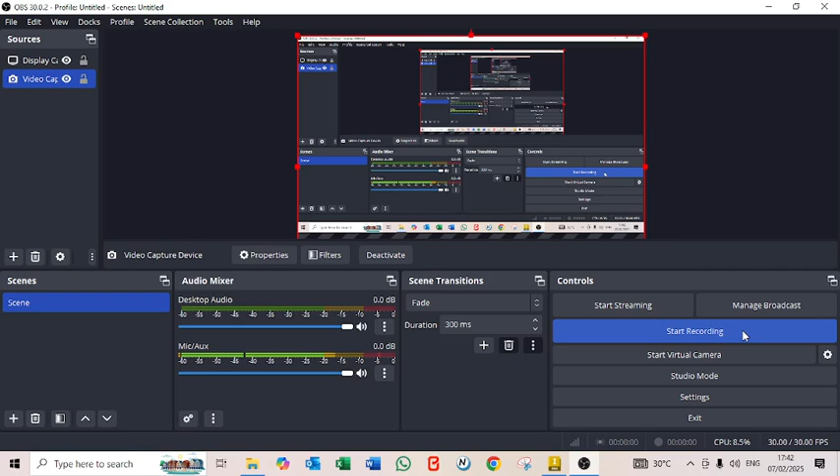Okay, so I just want to explain briefly how to go with the process of doing the plant layout and the positioning of the equipments. Then after that, I need to draw the equipment and how to assemble it, just for few students who might have challenges, so that you can see it's not something difficult, it's something easy.

So you have opened the program of Inventor, then I'll go to new, just for me to start the whole drawing, the whole project. So I need to draw the site first. Yeah, it's still opening. Let's give it a bit of time.

So I'll choose the way I want my pipe rack to be. Each and every student, you've been given a mandate to use different methods so that you can learn. Don't copy what I've done, but use the concept that I'll give you as an example.

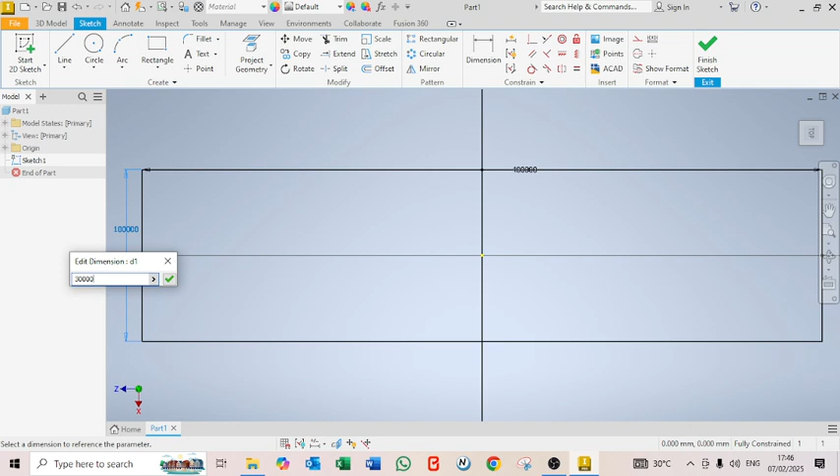So this is my site where my plant is going to be. After doing that, I'll extrude, because it is representing the land where the plant is going to be.

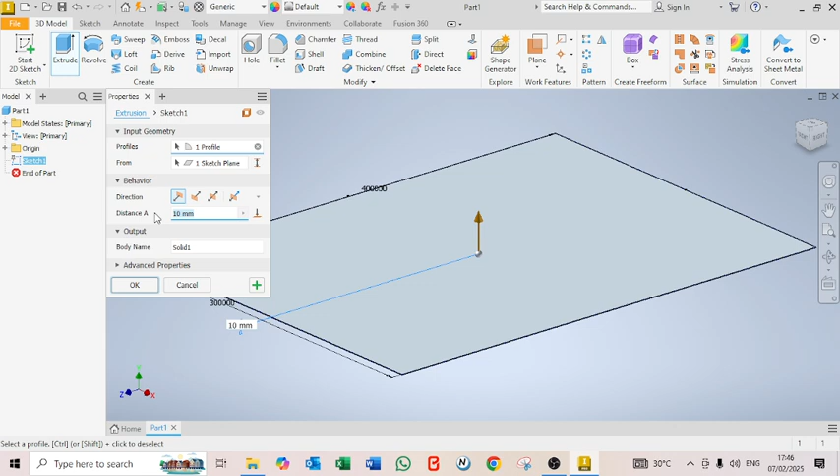So the thickness, I'll just assume, let me just say maybe 100. Yeah, that's the thickness. Then I'll go to sketch and click on it.

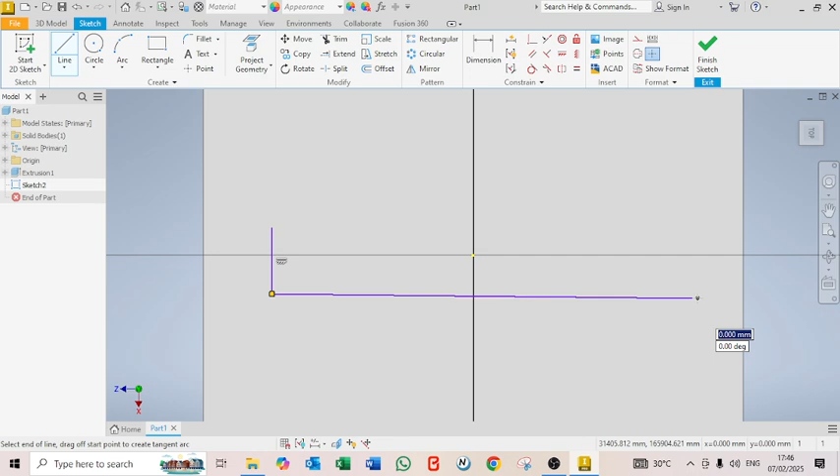Just setting up where my pipe rack is going to be. So I want my pipe rack to take that position, and okay, fine, sorry for that. Okay, I just enjoy to draw without caring so that I can have control over the constraints. Yeah, so I'll constrain this vertically and horizontally, cancel.

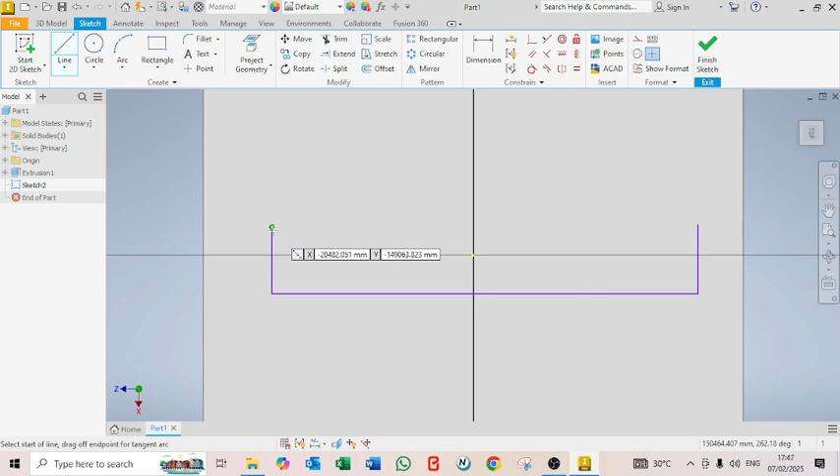Then I have to draw a line from there and there, then also I'll do the constraint of this. Okay, it's fine. Then I'll say equals, just to make sure that my lines, when I click on one, they'll be fine. Okay, so they are already equal. Then I'll put dimensions.

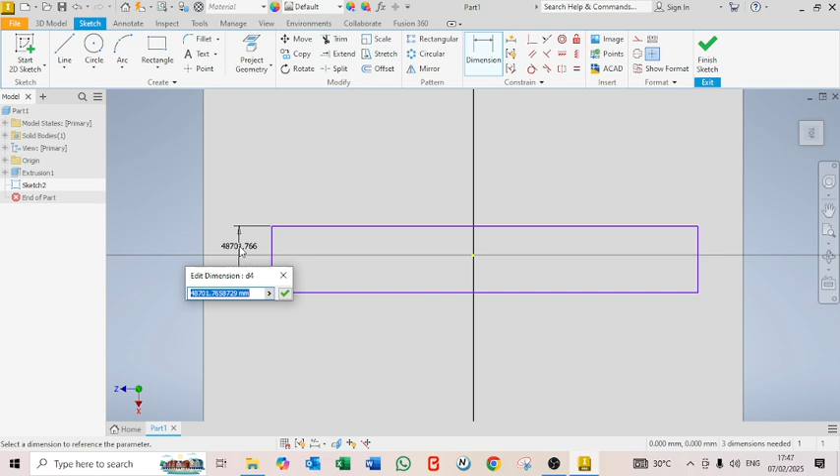I want the spacing between the prints to be 10,000, which is 10 meters. And the total length of my pipe rack, let me just take it to be 200,000. Then okay, I'll increase to 300,000.

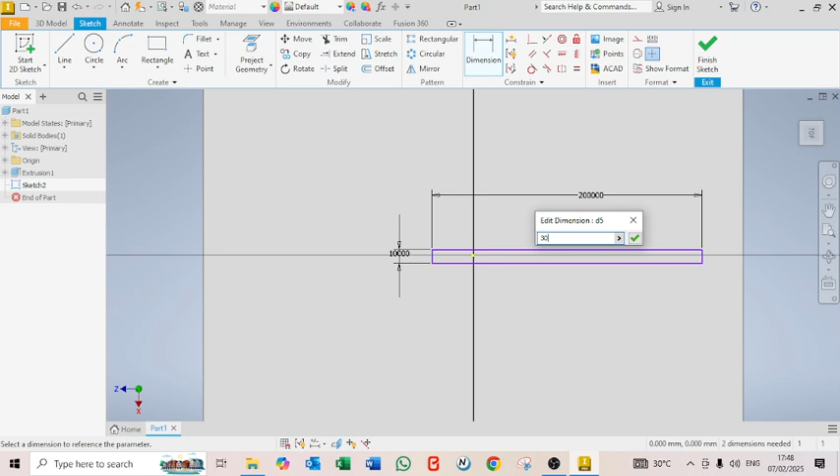Okay, as usual I'll just do this. Then vertical constraint, I want it centralized, so I'll pick that green dot, click once and click there. Then it will be centralized, and on horizontal also I'll do the same, centralized. So that is the position of my pipe rack.

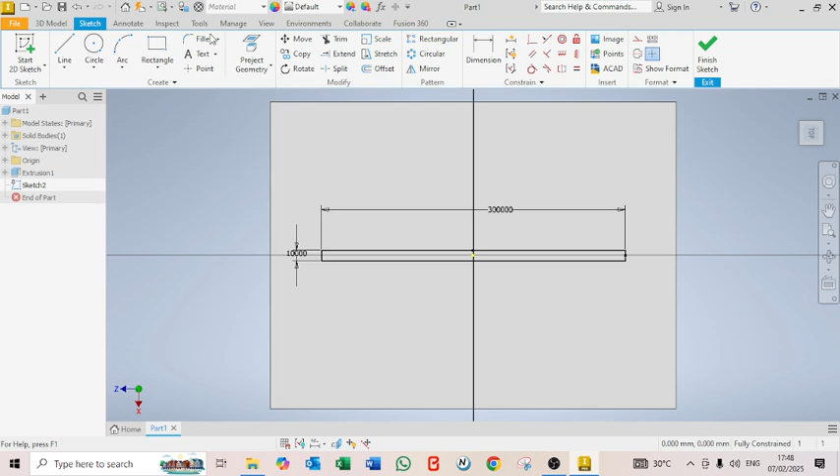So why have I drawn this? The reason is I want to put the plinth at the corner there. I just want a simple one, straight one. Yeah, other students, as I said, you can do it the way you feel is the best. Okay, sorry, I don't want it to touch.

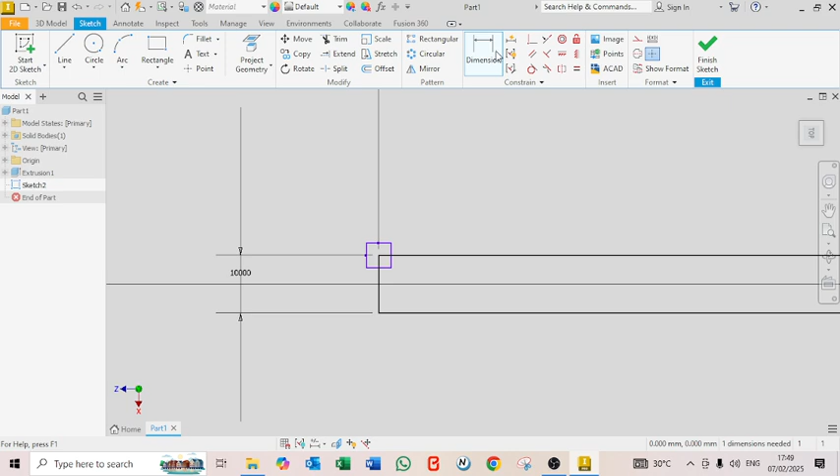So I'll say this one must be constrained to that corner. Then vertical, I want this one to be constrained to that. Then I'll say equals, this line must be equal to that, and the plinth will be just 300 across. Oh, look how small it is.

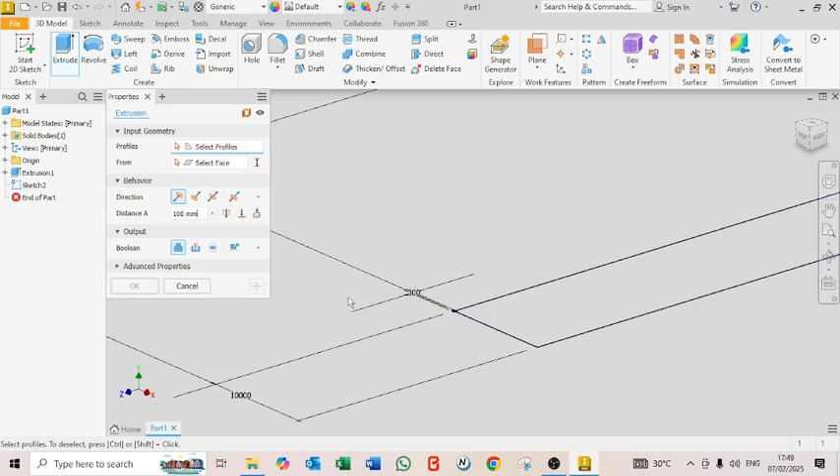Yeah, then from there I'll finish and extrude the plinth. I don't want everything, I just want that. Though I drew the whole thing, it's just for you to see how you would do the setup, but at times it's not necessary to do the whole thing. You just need to position the plinth where it will be.

Okay, I've got it 300. Click home, it's a very tiny thing, you can see there. Yeah, then array. I'll do the array of this, and the direction, I'll pick that. Also, I'll also pick that.

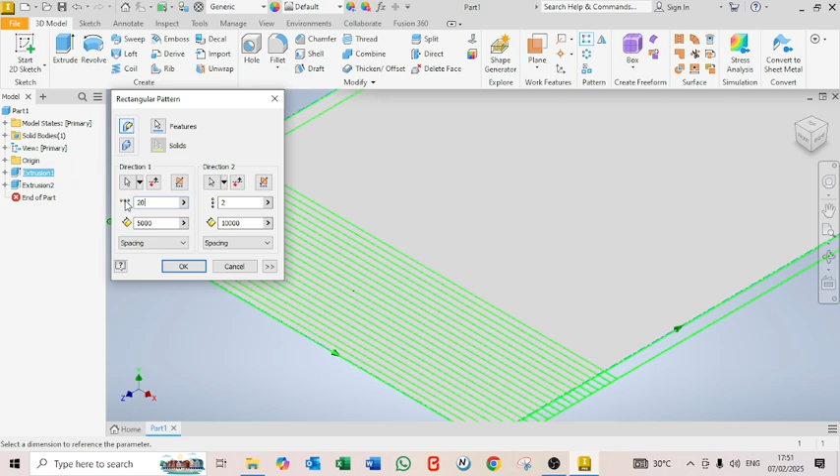So this side I say 10,000, that's the spacing. And this side I'll say 5,000. 10,000 and the 5,000. Then I need, maybe, let me say, I need 20 of them.

I need to swap, the 20 must be here, then here is 2. I wonder why they show those, let me just check the object I picked. Yeah, okay, array, it's this one.

That object. Direction 1, I'll make use of it, it's that. And I said I want 5,000 spacing. I want 5,000. This other side, oh sorry, I see 20, I need 20 of them. Then this other side, direction, I go that way.

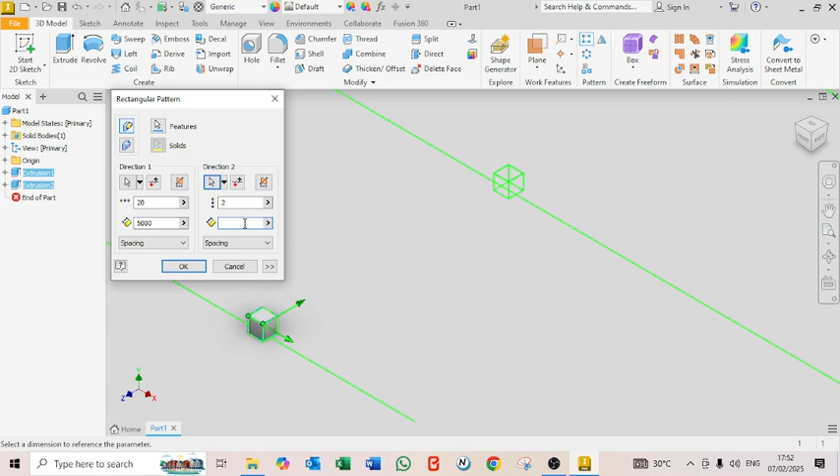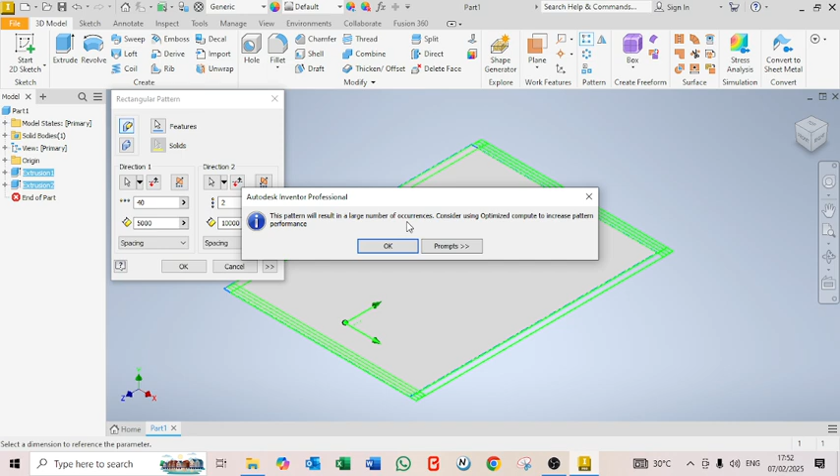It's 10,000 spacing. Okay, I think it's because of graphics, so you find that it shows the lines as well. Let me just go home and check. Okay, that's 20,000, let me say 100. With 100 it's too much, let me say 40. 60. Let me see.

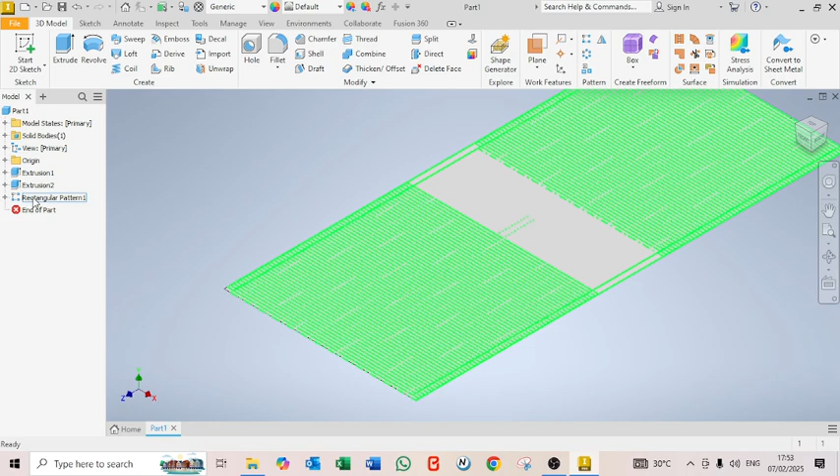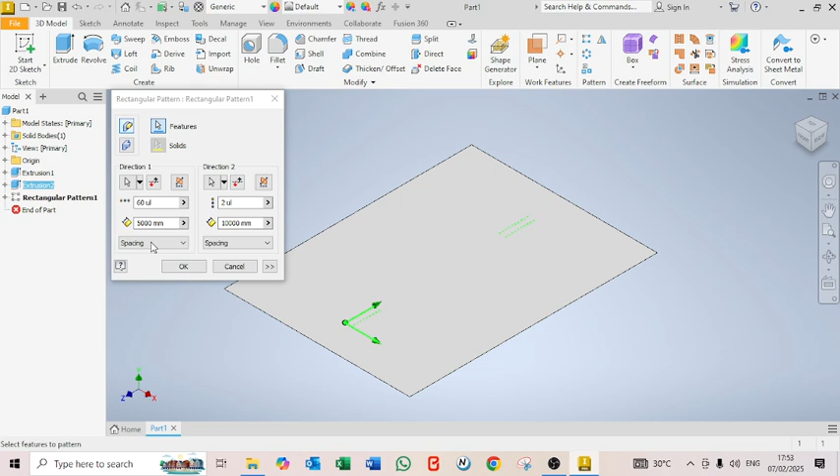Okay, it looks like when I pick the object, it is also picking this one. No wonder. So just go to edit feature. I want to... okay, so it was picking even what I didn't want.

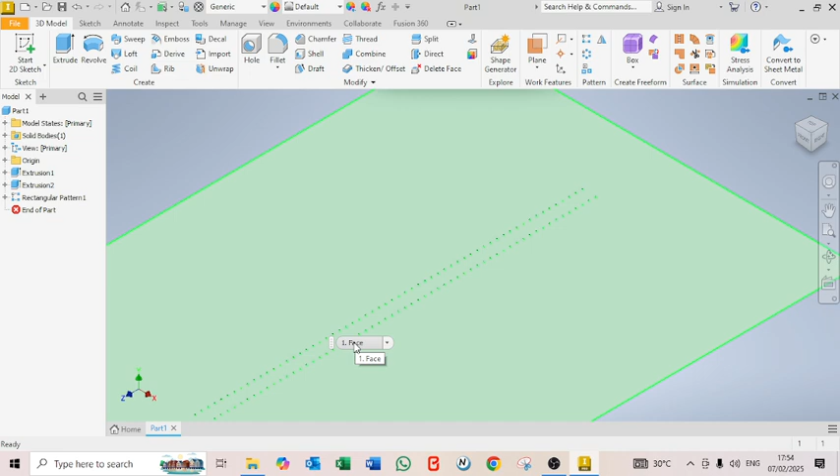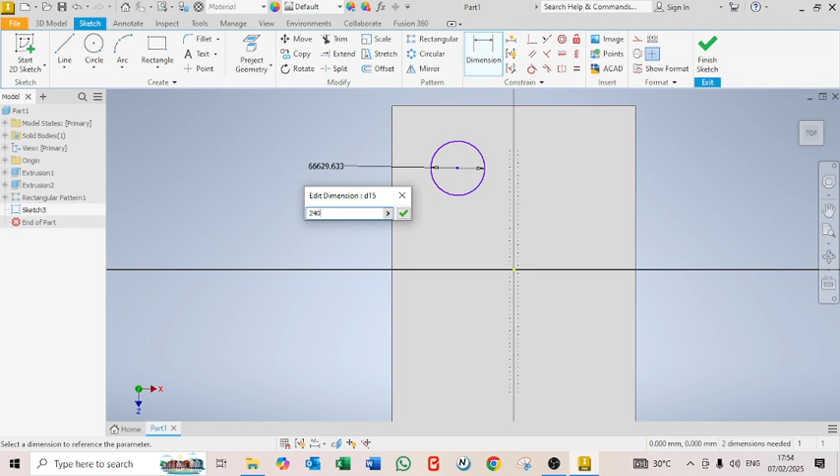Now I want to position the equipment. So I'll say okay, my equipment one, it's somewhere there, and the diameter is 24. It's a tank, it's 24,000. Then I need to position it from the center of the design.

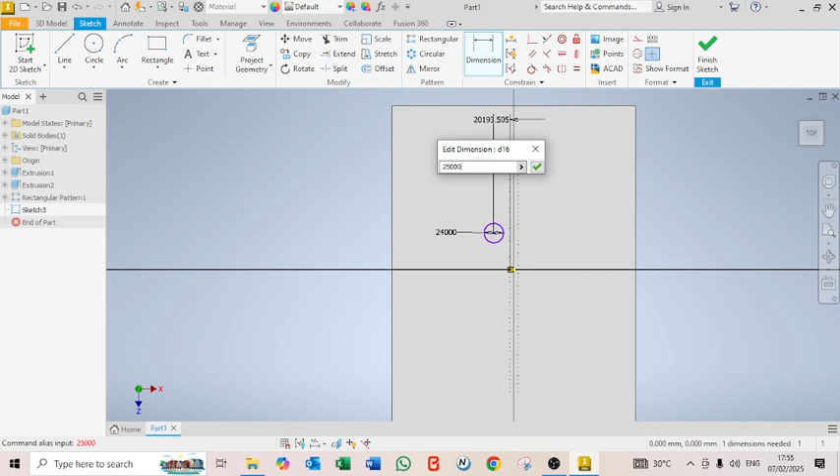I need to add the spacing because it's 5,000 and this 24, so I can work around 25,000, so that I've got about 10 meters away from there to create the space where I'll put the pumps.

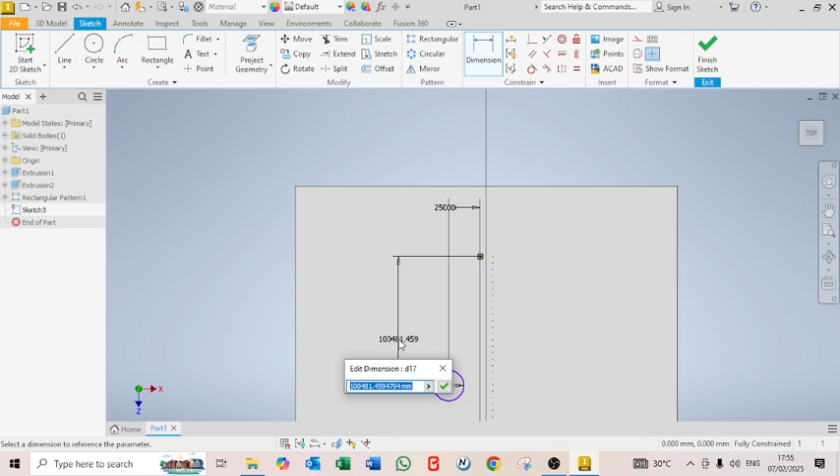Then I need also to make sure that from maybe the last print to there, maybe it's about just 5 meters. Okay, so I've got the print for that.

So if I want another one, I'll go and position to say okay, I want the position for my heat exchangers. Because there are 4, I'll just create a platform where they will sit, and I'll give it a size.

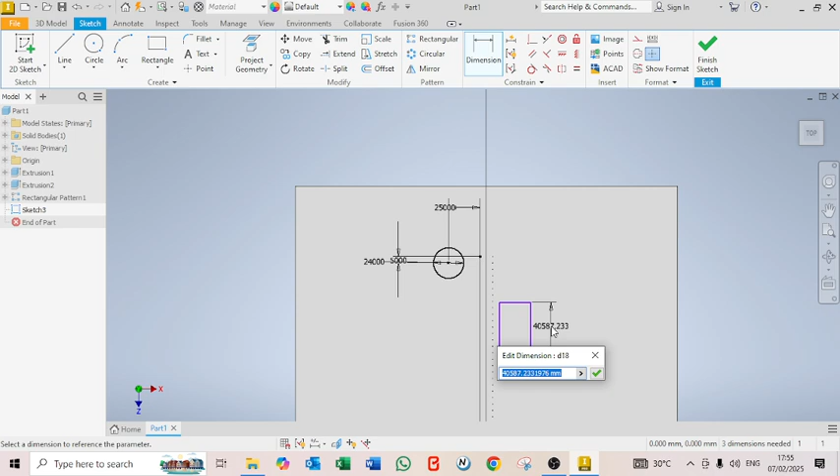Maybe about 20,000, which is 20 meters, if they'll all fit there, and the length of them I'll say maybe about 10,000.

In this case, I'm just approximating. You take the measurements from the standard designs. That's why you need to take the measurements.

Then I'll work with maybe from there to there, I'll just say about 5 meters as well. Yeah, 5 meters.

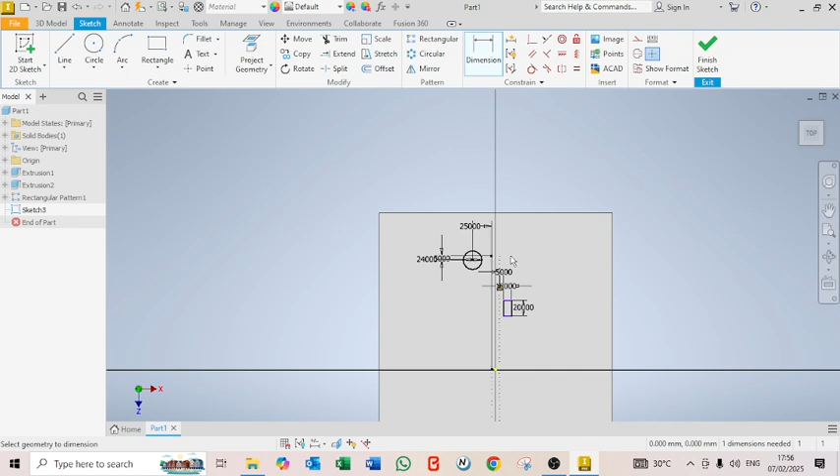Then from there to there... come on, okay, it's fine. I want to pick the point. I'll say about 30,000, 30 meters. Okay, fine, I've positioned what I want.

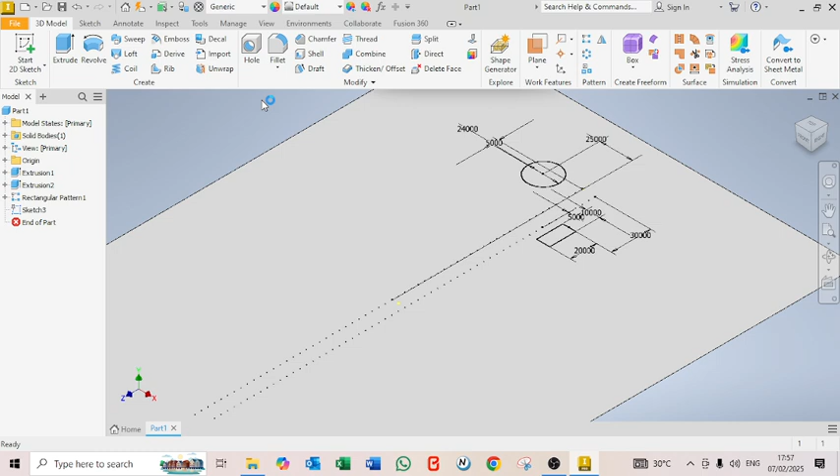Then I'll go finish. I don't want to draw everything, I'm just giving a sample. Then extrude from there and extrude this one. I'll keep 300. Then okay, so now you can see the positioning of my equipment, the way it's coming.

So I've created this one. This is the sample. Then I'll go save.

I need to create a project where I'll just save in my documents, and I'll say sample plant project. Then click. Then I'll save here, I'll just say sample plant layout sample. Save.

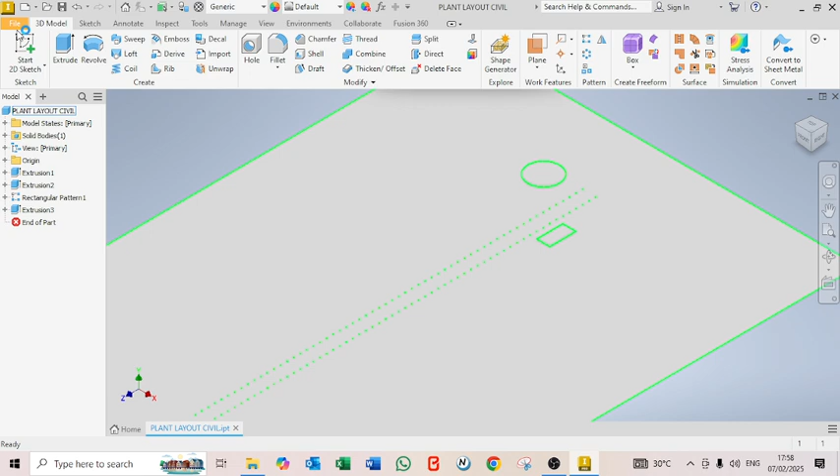Okay, now I'm going to draw a tank. It's a new sketch. Don't draw everything on one because each item must be produced on its own. So I'll go to draw a tank and I say okay, this is my tank.

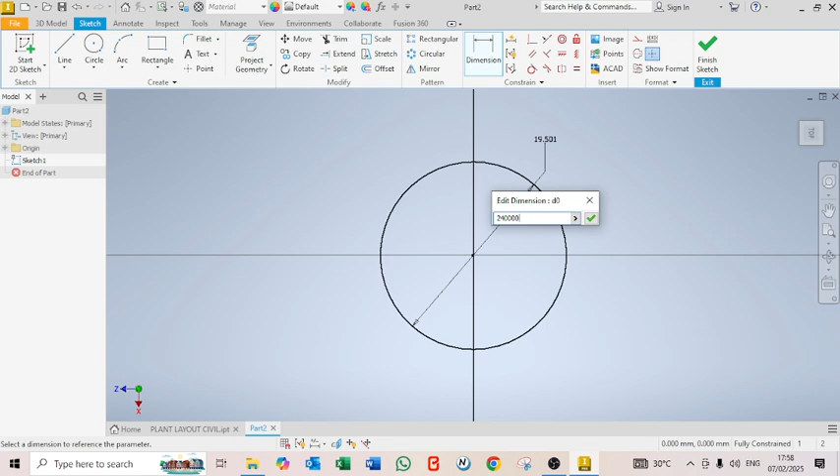Click there, I'll click here. The diameter I worked with the 24,000, I just took the actual size there. Then if enter, finish. Okay, home. Then I'll extrude.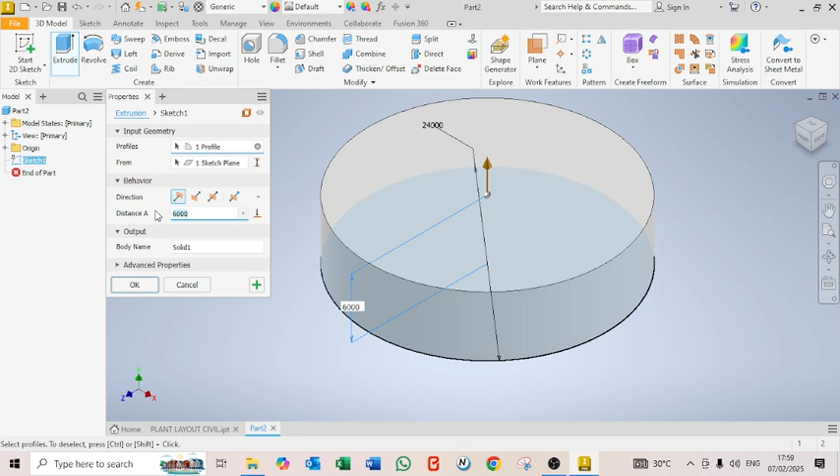The height is about, okay, the height is about 6,000, which is 6 meters. It's a storage tank, so I'll keep it that way. Was it 10 meters? It was 10 meters. You double check on your work, finish. So that's my tank.

Okay, and my tank on top, it must be dome shape. So for now, I'll just draw it the way it is. But you must make sure all the nozzles and the shape it should have must be drawn.

I'm just showing you how you are going to constrain there. So I'll call it tank, but the actual name is the 127TK something, you know the details. Save as a tank. I'm not putting the full details of it.

Then I'll go to assembly page, new assembly, standard millimeter IAM. Bring the assembly.

Then I'll go to place. It will take me where I created my project. Sample, click there. I'll bring the plant first.

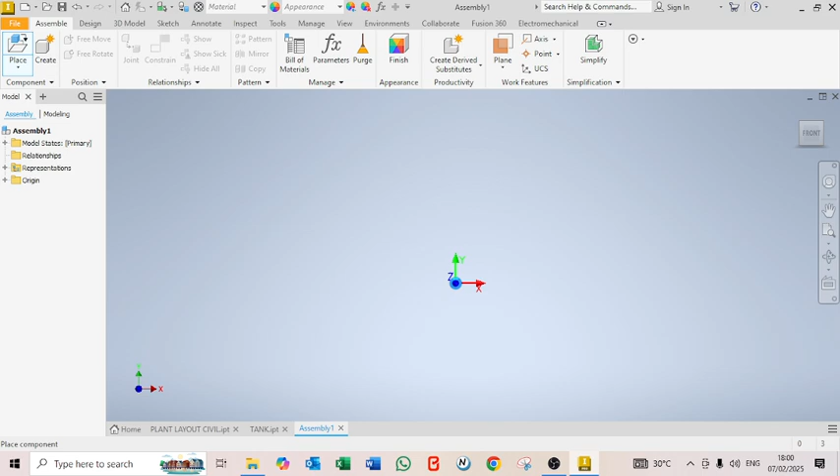Click once. Once you bring the plant, you make sure you constrain it. Don't just bring it and forget. Constrain the plant, otherwise when you finish it won't take up the actual shape you need.

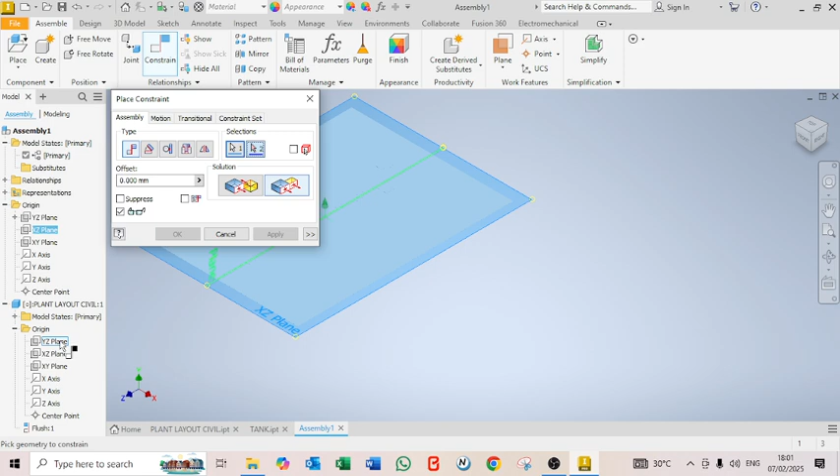Then I'll go to that and this surface. I'll check my, okay mate, apply.

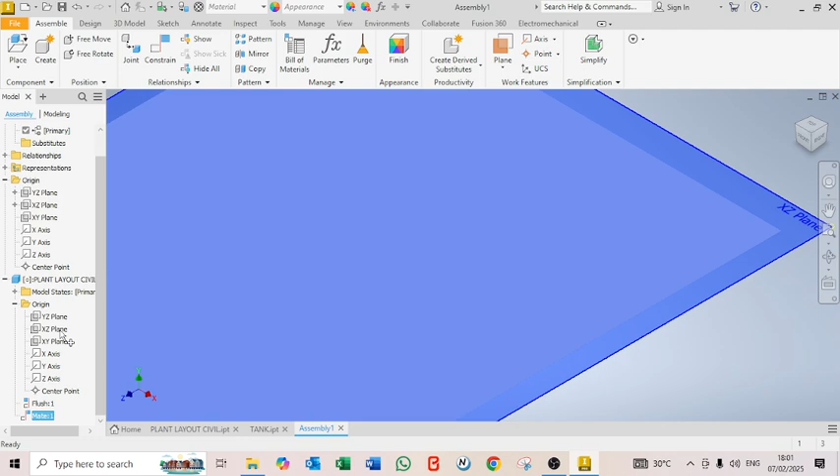Now you need to check that the equipment positions, they are visible. If they are not, go back, edit feature, do the edit, then flush, then apply, then you see these ones.

Okay, the last constraint I have to do is that one. I'll check with this one. If it won't work, I'll use flush, then apply. Okay, fine, now my plant positioning is set.

I'll go and bring my other equipment, which is the tank. I said to myself the correct names, like this name for this tank might be 127-TK-, then it tells you the other details. I'm just giving you a sample how you can go with it.

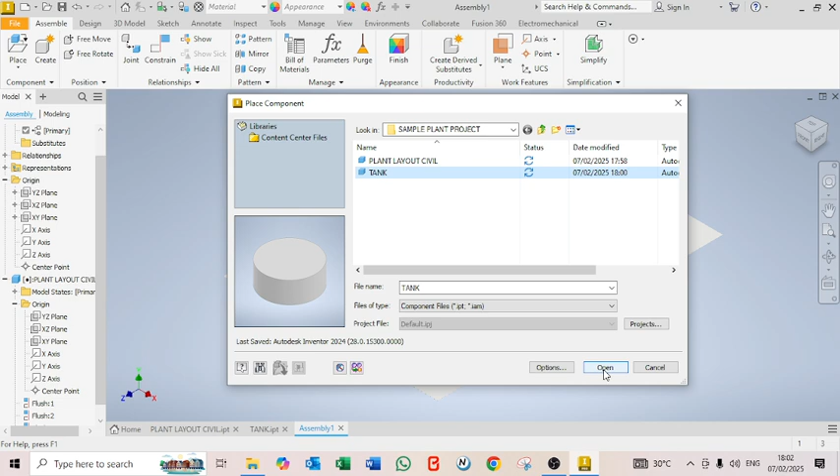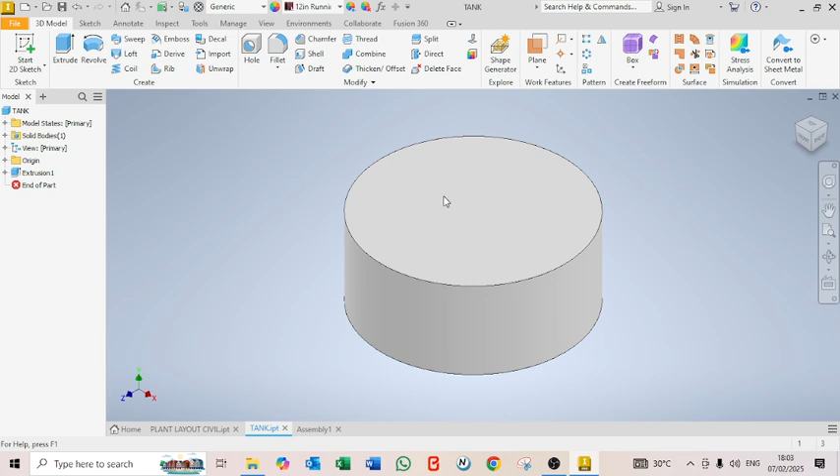Then we open it, I'll bring it there. Now I might want to give it a color, okay, so that it is not appearing the same as the rest. So I can give my equipment the colors. So in this regard, I'll say let me give it that color. So that's a color, it's just for coloring.

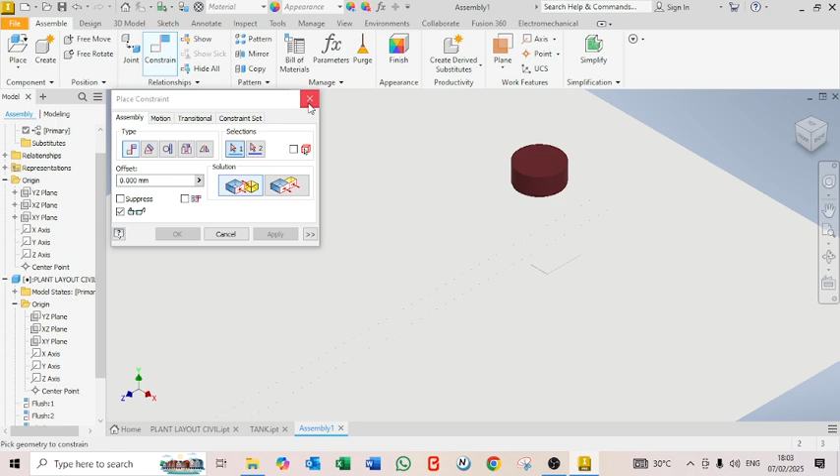When you do the equipment design, that's where you put all the details. So constrain this face to that face, apply, then you come, center, and that, apply. Then it shows you now that you have your equipment in position. Okay, you have your equipment in position.

Remember, you have done the pipe rack. I've already shared the video on how to put the pipe rack, everything. Now after the pipe rack, you draw the equipment and you constrain the equipment. Then after that, I'll be able just to show you now with the pipe rack, the equipment, then how to do the piping.

Others already know what to do, but for now, this is how you bring the equipment. If you have any question, please feel free to contact me, and I'll be able to assist. Thank you very much.